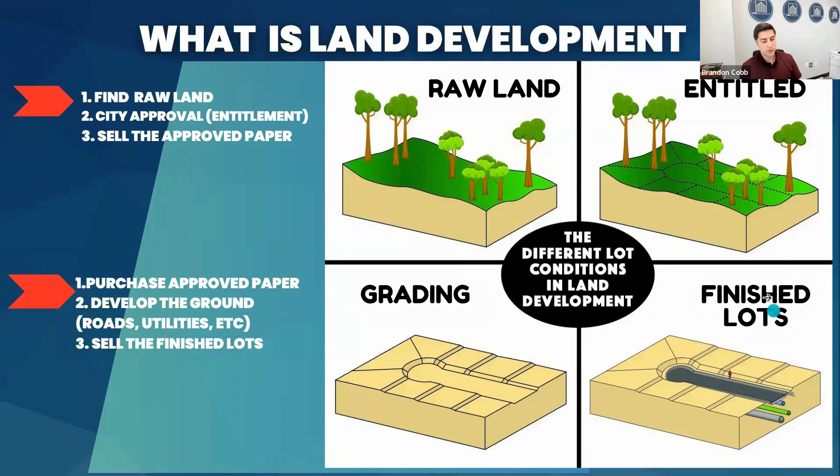So there's two options: one, sell the paper, and two, actually sell finished lots to national home builders. There's pros and cons to both, and this is a lot faster of a process, right? So construction drawings are finished, and then you sell that to a national home builder or a developer that wants to develop. And this is a lot longer of a process because you have to actually do the development, right? And the process definitely depends on what state and county and municipality you're in. It can be shorter or longer. If you're in California, I'm sorry, it's a long process, or New York, New Jersey, etc.

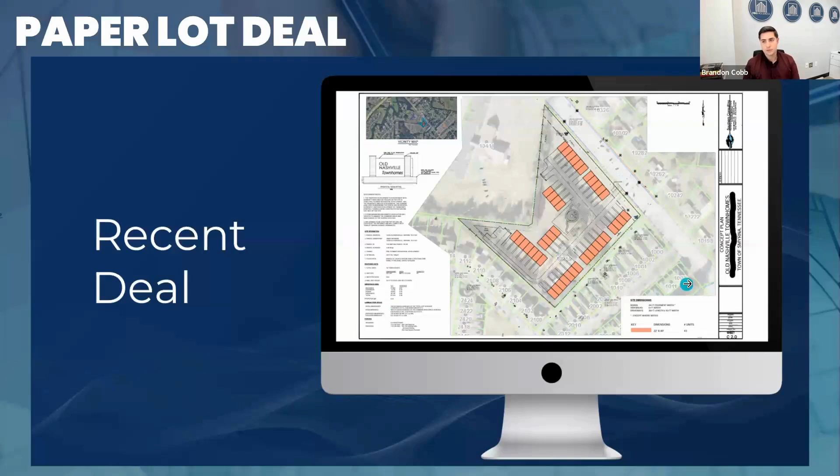It was one of the first entitlement process, paper lot deals. This is one that we just did in Smyrna, Tennessee. And there you go. We made $446,000. It was pretty easy deal. It would have been easier if the person that brought it to us actually followed.

There's some missteps, but I think it was a really good learning lesson for that person, honestly. It probably would have taken 6 months, but it took 12 months. And we didn't have to. It probably took about 20 hours of work, honestly. And so it's pretty good return on investment there.

And then this is another project where we took that paper, but we actually got it funded and put in the actual lots. As you can tell, this is a townhome development. There was 36 homes there. There's about 34 single family lots here. This is actually called Seidov Cobb Way in White Bluff, Tennessee. And this is called Lala Loop.

So Seidov is my last name, Cobb is Brandon's last name, and Lala is my mom's name. So Lala Loop there. So that's something cool that you can do when you develop properties. Even if you're entitled in paper, you can kind of name it and honor people that mean something to you, and just leave a legacy behind. So I think that's one of the coolest things. That's one of my favorite things to do.

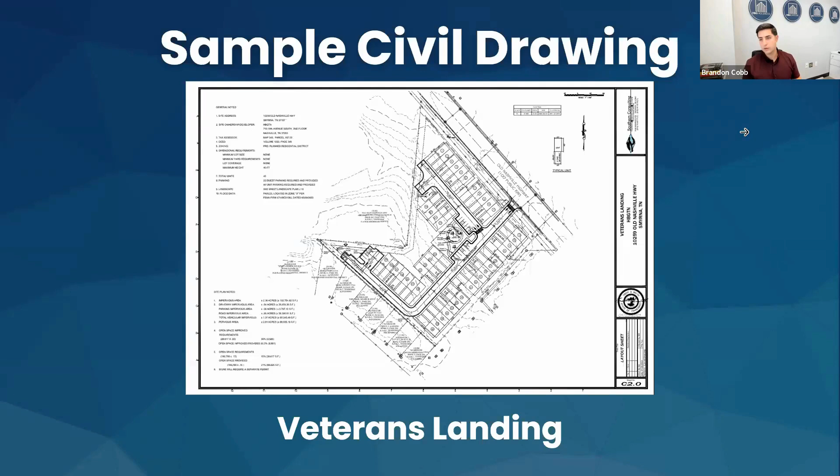And if you were to take this on, there are some items that I will cover at the end that I think are critical and that you can really lose your butt on if you don't hit on these. And if you do, you can save a significant amount of money. So I'll cover those at the end.

So how do we start? So right now you have a piece of property, you got it under contract, and you're like, where do I start? So you start by really talking to the staff, right? The stakeholders. You want to be able to talk to the planning commission, the city council, the planning staff. What do they want in the area?

So then, let's say that they want single family homes or whatever have you, right? So you have to make sure that you design a concept plan. A concept plan is literally just a basic drawing of what it is that you're going to actually put, right?

It's not exact, but it's trying to dial in the correct lot dimensions, widths, etc. to put those onto paper so you can understand the density that you're going to be able to get.

Okay. So this is an actual concept plan. We would take this concept plan that will be done by a civil engineer, and we'll put all of the roads, etc. that are in accordance with that local municipality. Specifically in this municipality, they have what's called the Hartman overlay, right?

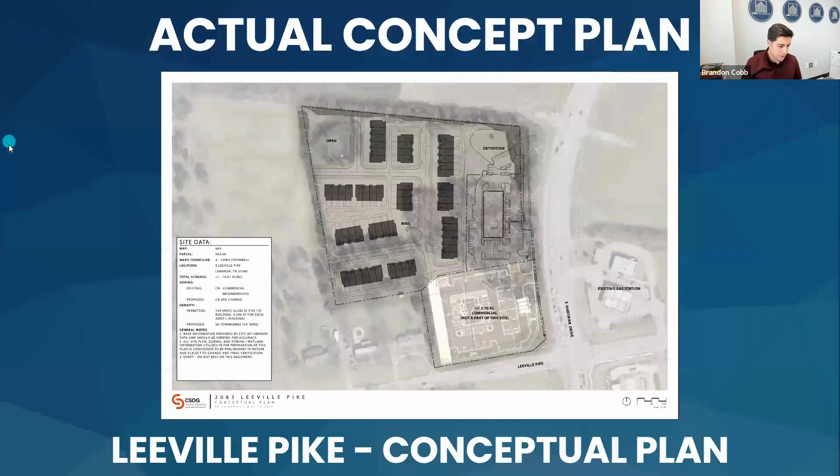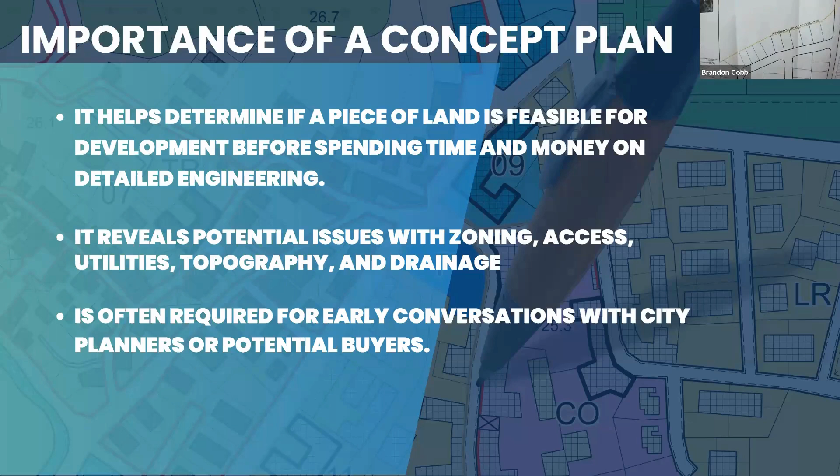And you also take into account, while you're doing this, so this is rather flat, I don't know if you could see this, but these are the lines there. The state has what's called LIDAR, which is the contours of the earth, right? And how it actually lays, to make sure that you're not putting a box onto a side of a cliff, because you probably couldn't do that. So it takes that into account as well. On this site, we knew that it was pretty flat, so the contours were not really that important.

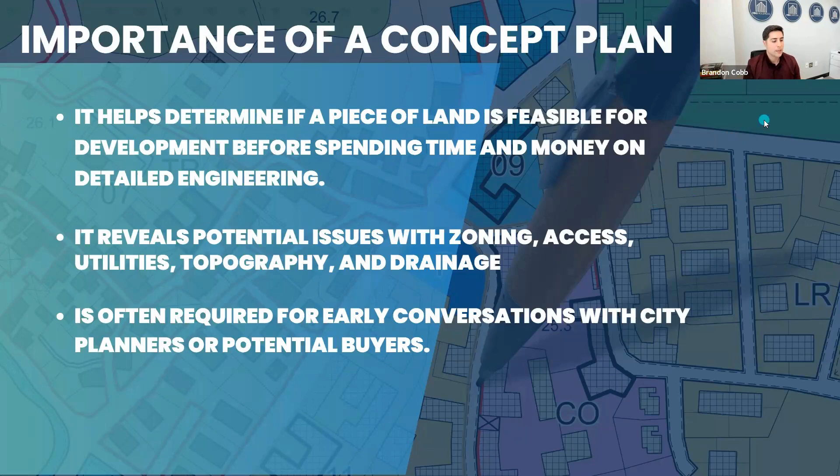So what do we do? How do we hire an engineer to do this? For our firm, we focus on hiring a civil engineer that is recommended by the municipality that I'm trying to submit to. So whoever they like working with, that's probably going to be the civil engineer that I'm going to hire. So when I talk to them, I ask them who they recommend. They'll give me a couple firms, and I'll reach out to those firms and I'll ask for a concept plan.

The reason I do that is because they have a working relationship with that municipality, and that planning staff and engineering staff know best who is a good engineer and who is bad and who they have a good working relationship with. Okay. Again, the good concept plan is going to have this.

A good civil engineering firm is going to have a good land planner, and that is somebody that knows exactly how to lay out a site. They want to have an actual civil engineer that can sign off on the actual construction drawings that we're going to go into if this concept is approved and the preliminary plat is approved.

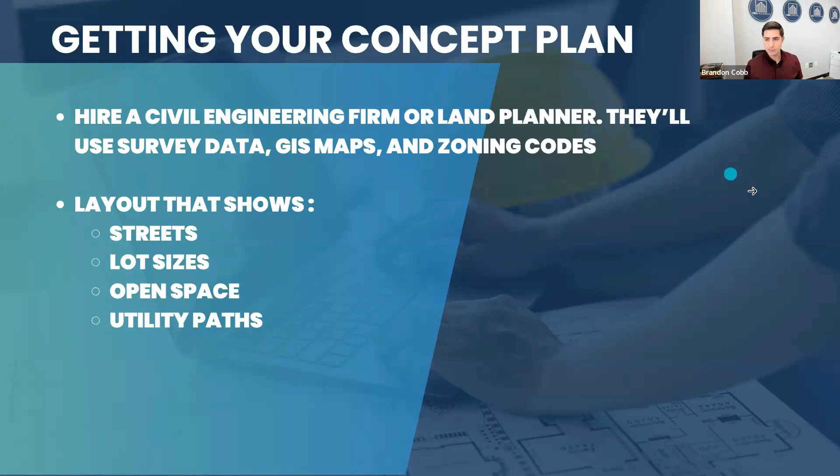And the reason for that is because they've got that civil engineer in there to see if their land planning, that concept plan, is actually going to be able to get built in reality, right? So it's a good check and balance to see if that land planner is in line.

So what we've got to do. When we're creating the concept plan, we want to make sure: what is the zoning? Like, what can we put on here? Sometimes folks are like, oh, I'm going to put an apartment here, or I'm going to put townhomes here. There may be a moratorium on townhomes, or maybe a moratorium on apartments.

Even if the zoning says potentially that you can do this, there also may be an unwritten moratorium where, yeah, you can put townhomes here, but no one on the planning commission is going to vote for townhomes because they don't want townhomes anymore. They have enough. They want single family homes.

So a good civil engineering firm is going to be able to tell you those unspoken things that the planning commission and/or the city council and the planning department has. Okay.

Brandon, any questions? Anybody got any questions so far? No, you're good, man. There's a couple questions in the chat, but we'll save them to the very end.

Cool. All right. So how do you know if you need to rezone? So you've got this concept plan, let's just say it's a commercial lot, it's got road frontage, and you want to check what the current zoning is. The current zoning is going to be on the GIS map. You can call the planning staff and ask them what their current zoning for that is. Like I said, it may say that it'll support townhomes or single family.

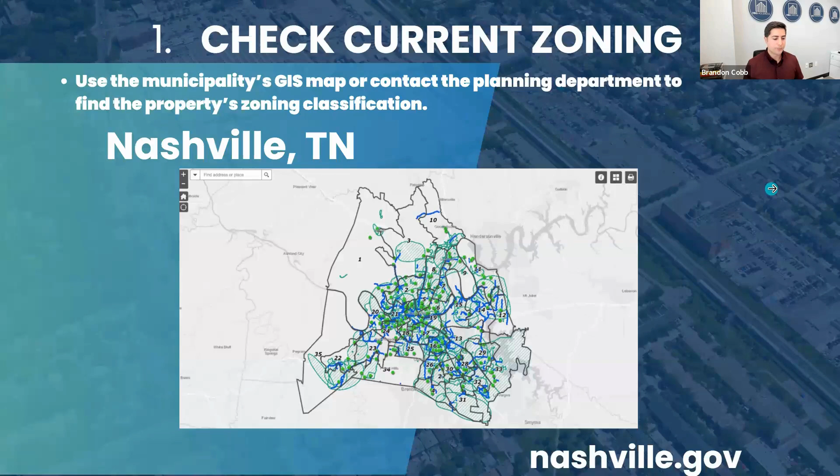So if we're in Nashville, we'll go to nashville.gov. There's the parcel viewer. We'll kind of go into a site. We'll try to figure out what the zoning classification for my site is. So I'll go to the parcel viewer. It'll tell me, let's say, R6. It'll say this is zoned R6.

I will then take that R6, go to the zoning classifications, and I didn't pull that up here, but you can go to the zoning ordinance, figure out what the R6 is, and it'll say 6,000 square foot lots. And let's say you have 60,000 square feet of lot, and you can be like, oh man, I now could put 10 homes here, possibly, right? So now this is where you kind of start your math.

And what you do is you'll go ahead and compare your site and what it is that you want to do. Let's say you want to put townhomes. Are there townhomes or single family homes in and around here? If the zoning allows, you can go ahead and put that in there.

And sometimes you have a commercial site and you're like, oh, I want to put townhomes here. And if there's no residential future plan for this area in the city's future plan, or when you talk to the city, they may not let you spot rezone that area, but they may.

So again, take that municipality, the agency review, and the planning staff will tell you what they want and don't want. Take that, and based on their guidance, you'll create your concept plan. You'll submit your concept plan to that planning staff. The planning staff is the staff that works for the planning commission. The planning commission are the members that have been placed by the mayor to vote on subdivisions to be approved or disapproved within the municipality.

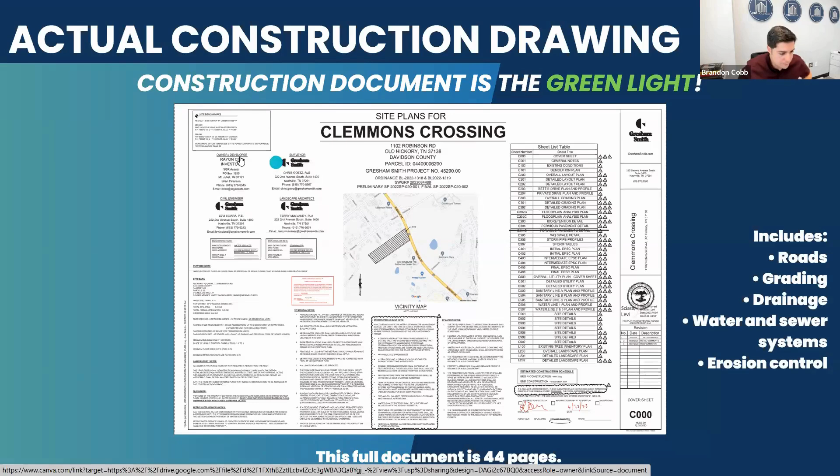So everybody see my screen? So now we can nerd out. Okay, so this document is 44 pages. I'm gonna kind of fly through it. If you have any questions, please put them in the chat and I will try to answer them at the end. I'll try to cover every single sheet. I may go a little faster because we're getting tight on time; it's a lot to cover in about 15 minutes. Here we go. Can everybody see my screen? Okay, great. So this is a subdivision that we are doing.

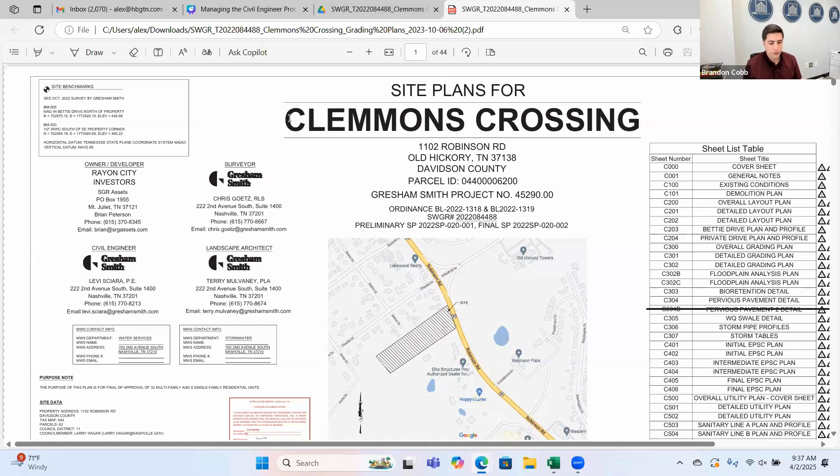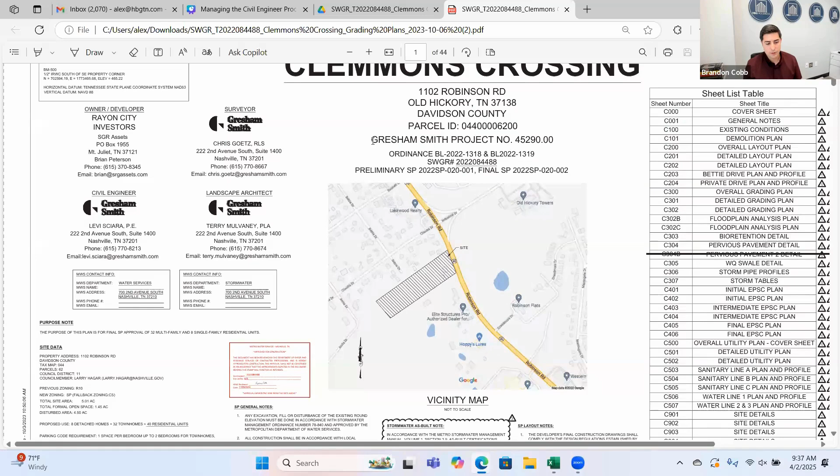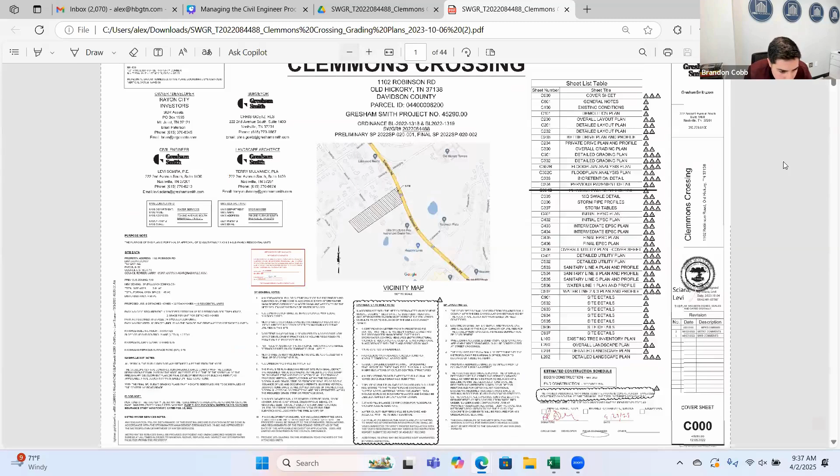The first page of a civil engineering plan has your title block, right? Clemmons Crossing is the subdivision. The address and the parcel of the actual property. Based on the municipality, it'll have the engineer here in the center, and the actual engineer who's designing it, to the right as well. Sometimes it's to the top, sometimes the bottom, but it's typically here in the margins.

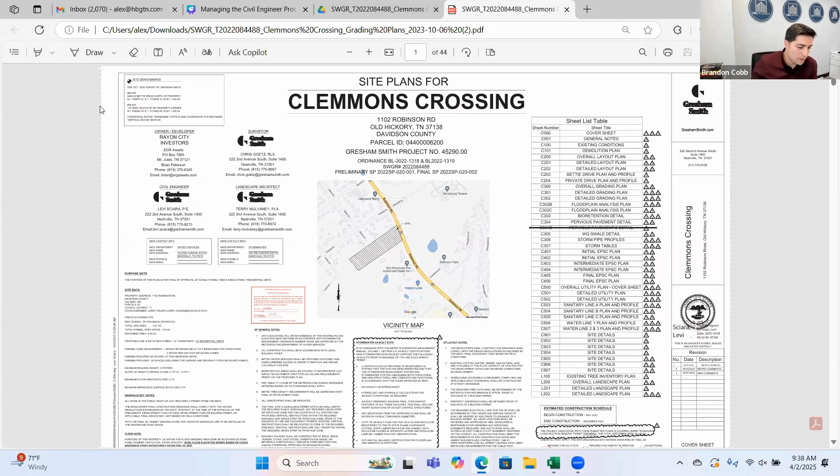In Nashville, it'll also have your stormwater permit number and your preliminary SP approval. See that? And your final SP approval. So this thing is approved preliminary, approved final, and now stormwater approved the grading as well. Then up top you have what's called a benchmark. Sometimes there's one, sometimes there's two.

A benchmark is a confirmed point of reference, verified by GPS, that says this is our 10-digit grid, and this is this point. Sometimes it's, let's say, the top of a fire hydrant. And it says the top of this is at 446.88 elevation above sea, and at this coordinate, north and south, right?

So you have a GPS coordinate for it. The reason it's important when we're doing civil engineering plans, we're talking about everything here talks about elevation and benchmark, and all that is, if you could just imagine your latitude, longitude, right? Your left to right, and the elevation is the depth of which you're going to be able to design your road, your sewer, etc.

These benchmarks that are set onto a site have a little GPS puck that we put on there, and it talks to all of the little tractors and all of the equipment to ensure that we're digging as deep as per the civil engineer in these design plans, and we are at that depth. It's just a confirmation to make sure that we are calibrated on this site. It's our calibration point to the site. It's called AKA benchmarks. Very important.

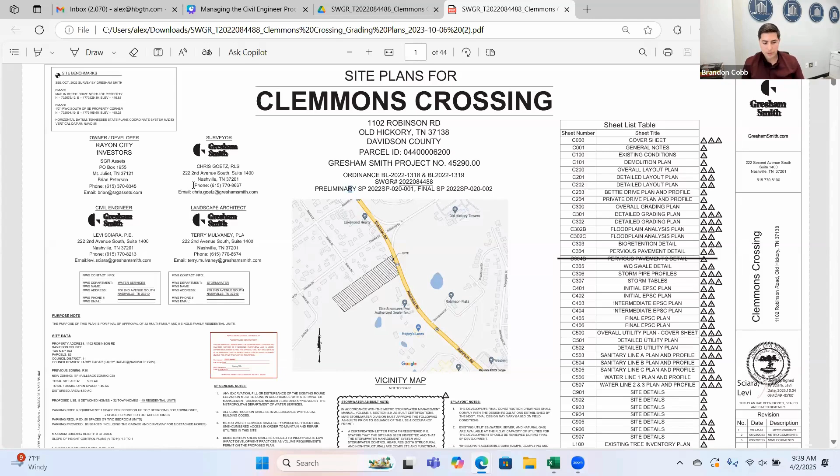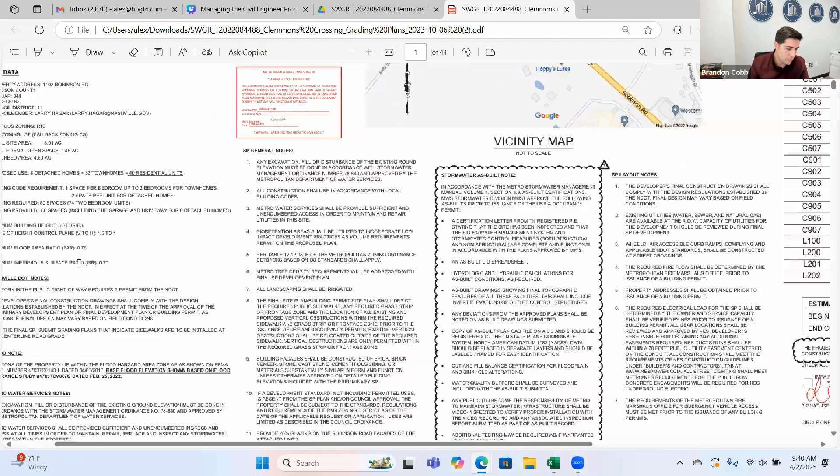All right. So talks about the developer. It'll give you who owns the property. Okay. And then you have what's called general notes and specific site data and special notes. Okay. That is all here. It talks about what kind of property this is. In every single municipality, the cover sheet sometimes is super detailed. It has a lot of data on it, and sometimes it doesn't. It's just based on the municipality.

In Nashville, it's very specific because every single reviewing body wants their specific notes. So the SP department, which is like the planning staff, wants you to have all these notes on here. Talks about the landscaping needs to be irrigated. You know, just this one point, why is that important? Because let's say you have 36 homes, right? And you have 36 water meters, right? Well, it says everything needs to be irrigated.

That means that if you have any grass that is outside of that actual lot, which you would, because you have some common space, it needs to be irrigated, which means you now have a secondary water meter that you need to account for in your construction budget, right? Because now it's another tap and it's now a bill to the HOA. So you want to make sure that you read, you understand all of the notes and all the requirements on your special notes and specified notes of every single sheet.

Okay. Your stormwater has, like, for instance, and I won't bore you to death because it'll be a lot to cover, but you have to do what's called an as-built drawing. So when we create our stormwater structures, right, the little drain that rain goes into, once that is done, so we have civil engineer plan, the blueprints that say, hey, go ahead and put this in. Then what we have to do is do an as-built.

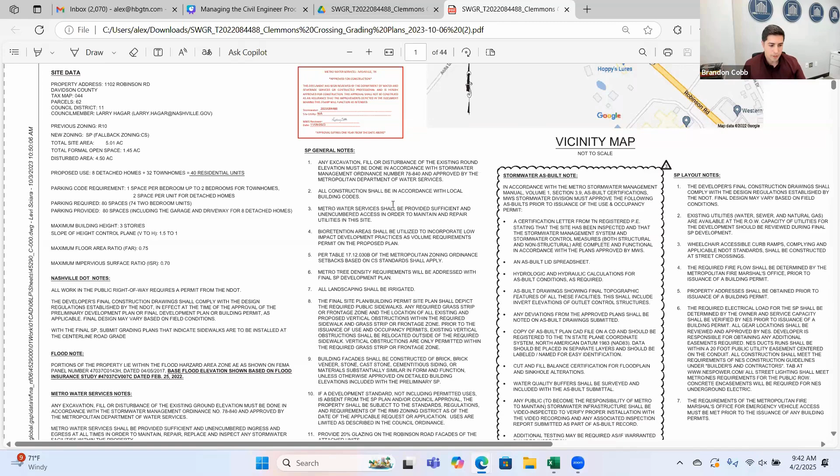And because you use that benchmark at the beginning of the project, you ensure that it's actually in the right spot in the right elevation. So what you'll do is do the as-built, and this is what the stormwater department is saying, is that it wants you to present that to them for them to give you an approval. So a whole bunch of notes, very important. Typically you have a signature here telling you that your stuff is approved and some signatures at the bottom.

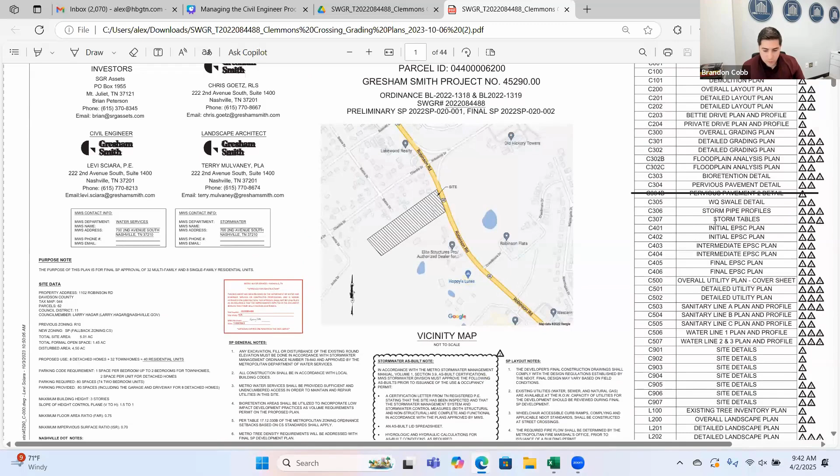This is what's called your sheet list table. Your sheet list table will have all of the sheet numbers, and it's going to have all the plans per sheet, right? So in Nashville, you have all these other notes, your erosion prevention, it has your grading and drainage notes, etc. Okay, demolition.

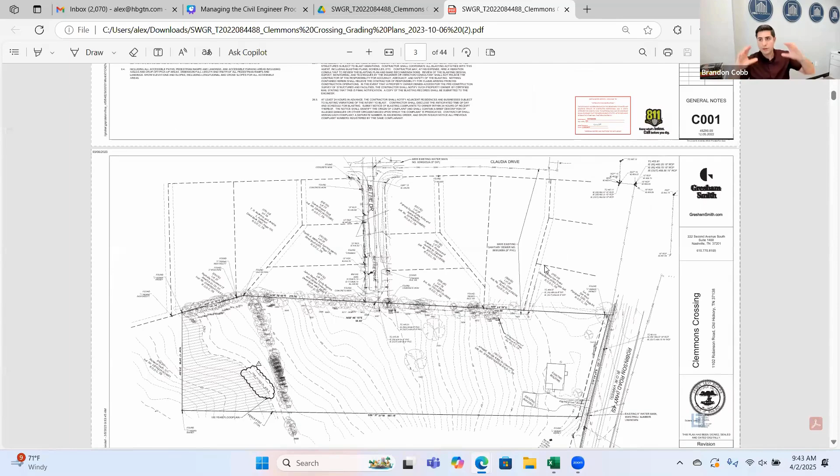So in here, this is what's called your existing conditions. So right now, when this thing got surveyed, this is the existing conditions. You have a house here, you've got some bushes. This is the current topography. Okay, so that's what this sheet calls for.

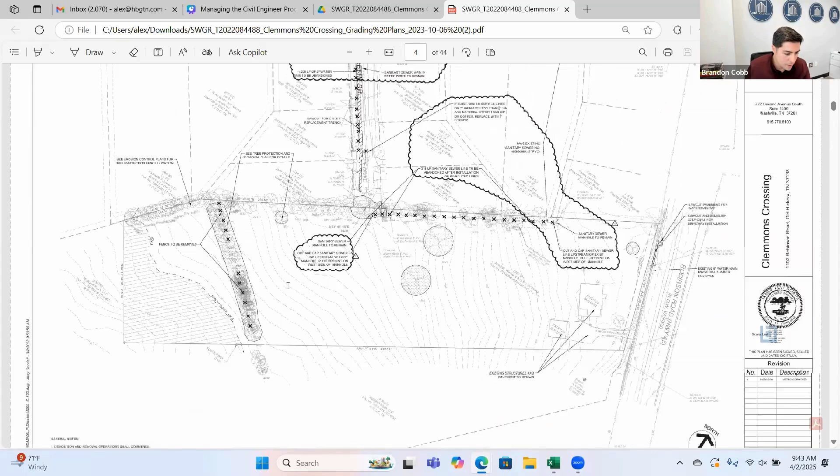Then you have what's called your demolition. Like what are we actually going to do to this site? On this site specifically, there's a house, we're going to actually keep that house. We're not going to demo it. Everywhere else, it's going to talk about, like this says, cut and cap sanitary sewer upstream of existing manhole, plug the opening on the west side of the manhole.

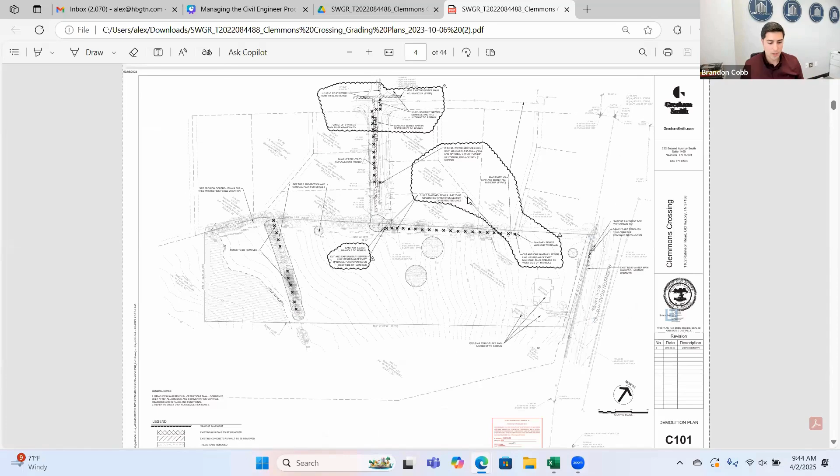So it's telling us exactly what we have to actually do. And then here we're going to have to protect the tree from silt, so we'll put like little noodles around it. So it tells us exactly what to do for our demolition or clearing of the site.

Okay. The next one is going to be your overall layout. So this is just overall, this is what the site's going to look like. And then you're going to get into your detailed layout plan, and your detailed layout plan is going to actually start talking about distances and the radiuses that are actually going to be on the drawing.

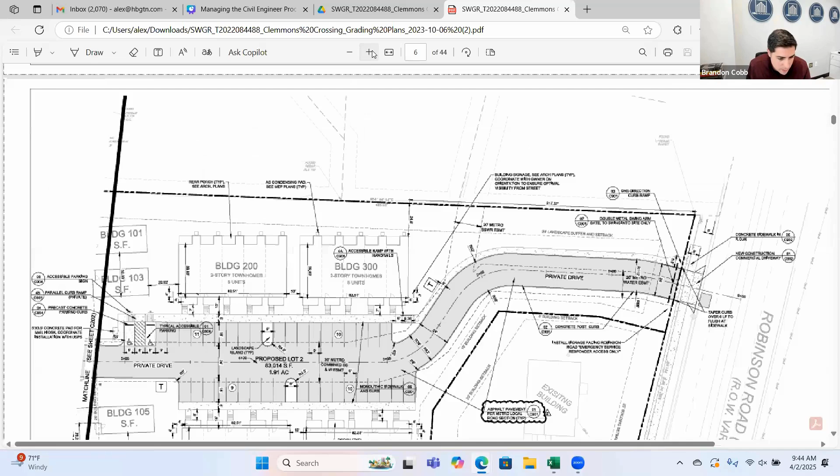Okay. Also, one of the things I wanted to mention is, over here to the right, you always have a revision. So let's say we got on the site and we need the engineer to revise it. This is very important because it has a revision date of like Metro Water, stormwater. They wanted a specific thing. We're confirming that this sheet now is in line with that comment of MWS, so we're on the right revision of our plan.

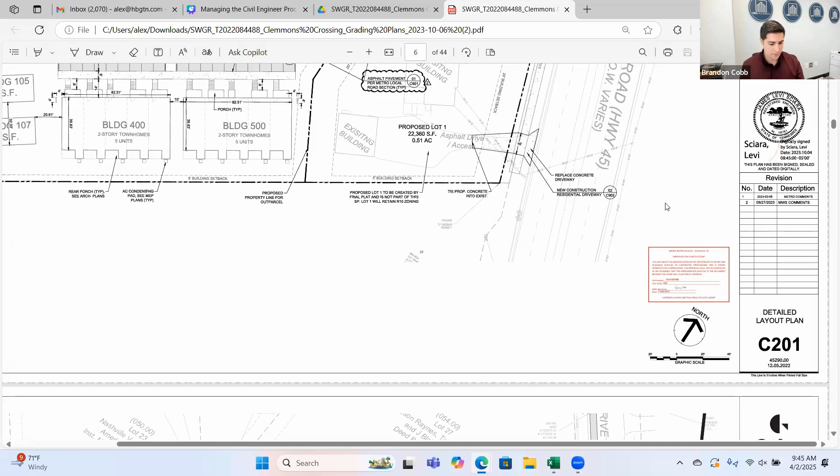Okay. So this is the detailed layout plan. And as you can tell here, there was a couple, right? So your detailed layout plan is going to be sometimes 2, 3, 4 pages. So let's just talk about it. Okay.

So here, you talk about, okay, how do I get my costs, my takeoffs, right? How much is this going to cost me? So there are companies that'll do what's called a takeoff. They'll figure out all the materials. Your civil engineer will give you an estimate of construction, and a civil contractor will look at all these plans. And the more details there are, the more apples to apples you're going to get of an actual bid. So it's very important that you have very good detailed plans.

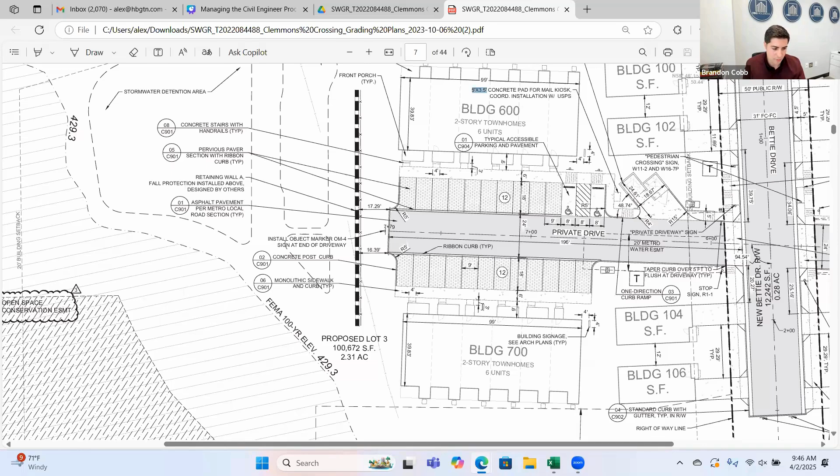For instance, this says a 5-foot by 3.5-foot concrete pad for a mail kiosk, right? So now you have to think, okay, I have to get a mail kiosk. Not only does it have to have a concrete pad, but now I have to buy the actual kiosk. So this is going to allow you to really figure out how much this whole thing is going to cost you. And then we'll talk here in a second about some value engineering of what you can do. All right, here we go.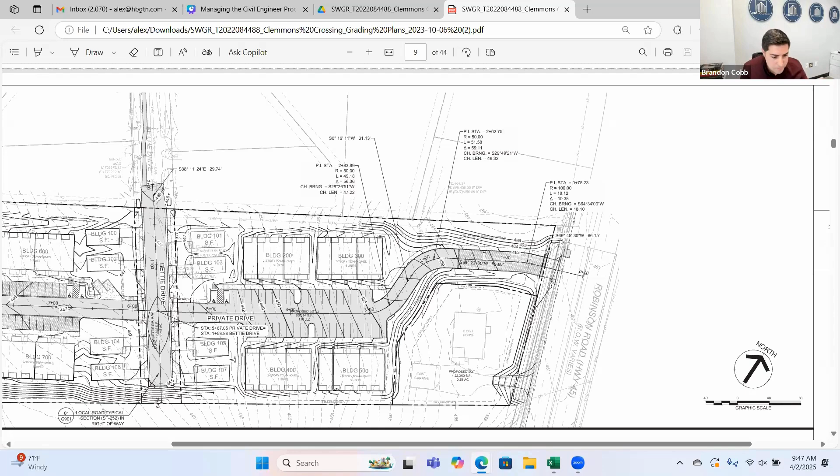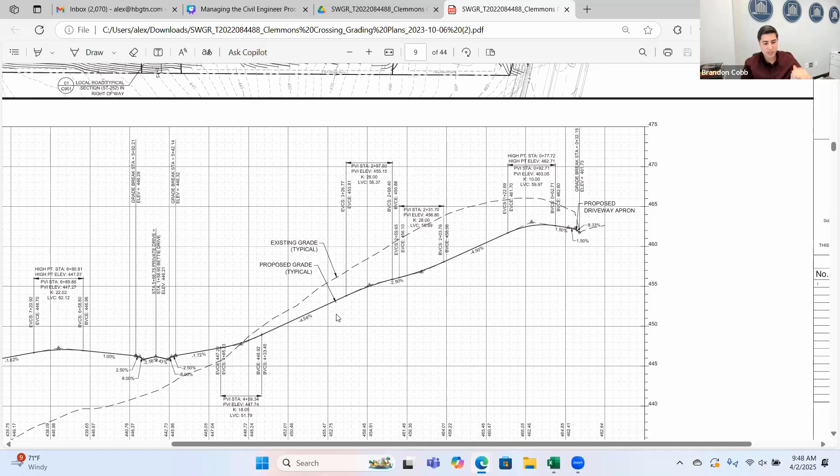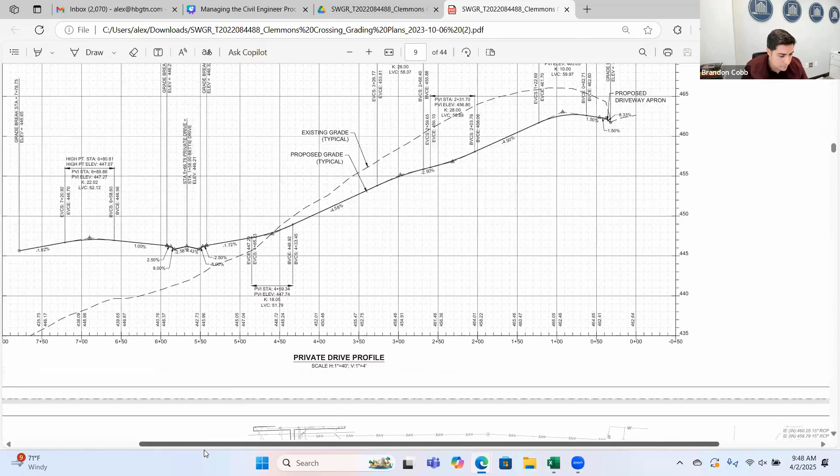Okay. And then this is what's called the profile, and it's telling us that this is our current existing grade, but this is our proposed grade. So in this instance here we are cutting, but in this instance here, we're actually filling. I don't know if you can see that, right? And it'll tell you at what degree, what elevation and at what slope you're actually cutting and or filling your site.

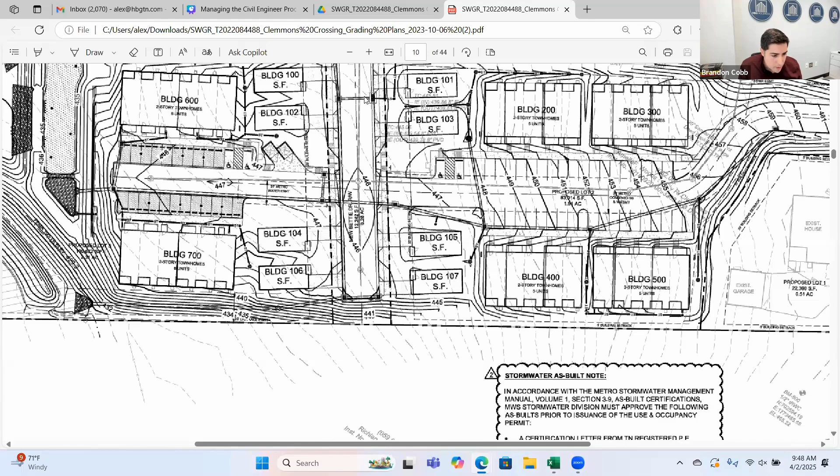All right. So this kind of continues, and then here on this sheet we have our stormwater. This is where our stormwater and grading is very important. Based on how your civil engineer grades your plan, you see how this site kind of looks like this. This is your high point. And they're grading the entire site to then go into these little black squares. Those are your stormwater structures and your stormwater pipe.

I will fast forward to... Those are like the ditches that the water drains into on the side of the curbs? Correct.

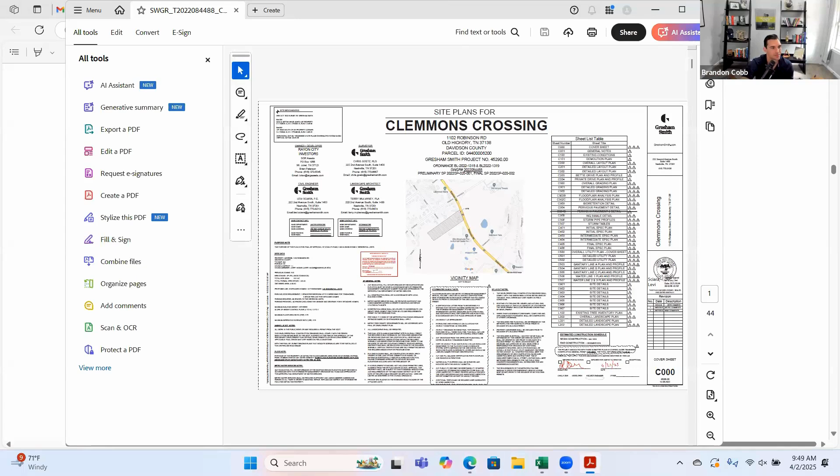It's not... I don't know why it's doing that. Download. Hold on a second. Give me 1 second. For some reason it's acting kind of funny. So excuse me. All right. Can you still see my screen now? I think because it's a large document, it's taking time to load as you scroll down. Do you see it now? Yeah. I have it pulled up again.

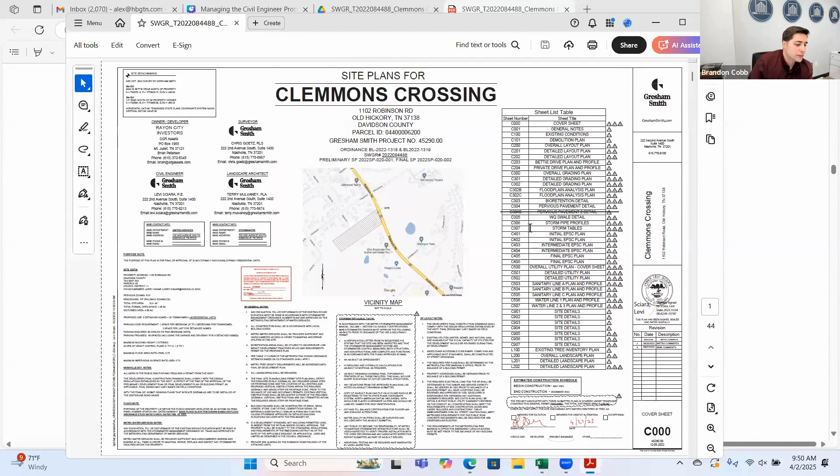Tarek, do you see the first slide? Like I'm on. All right. So let me go through back to. All right. Okay. So here we are.

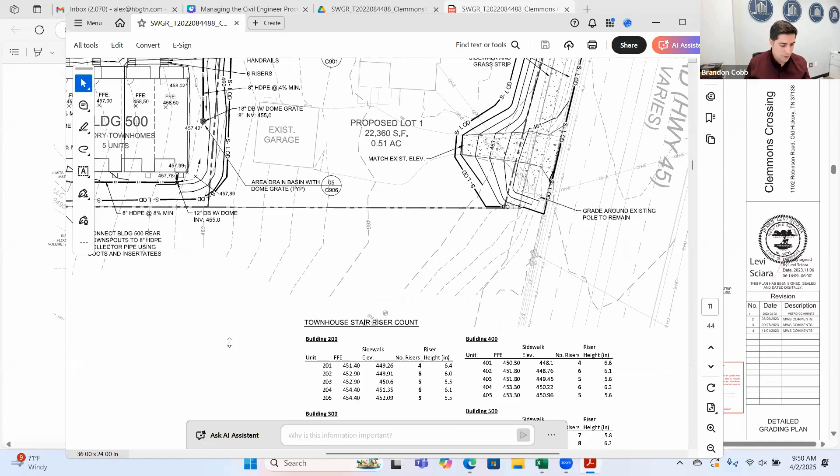We're at the grading plan. This is what I wanted to kind of talk to you about. So this is where on this specific site, because it's an SP, you're telling the city exactly what kind of homes you're going to build. And in Nashville, they want to know the elevation of what's called the finished floor elevation, FFE, of every single unit. Okay.

So when you go here, it says your elevation is 455.5. That means 455.5 feet above sea elevation. And then this is 457 feet. That means when I grade, that second home is going to be 2 feet higher than the one. So it's going to be kind of stair stepping up.

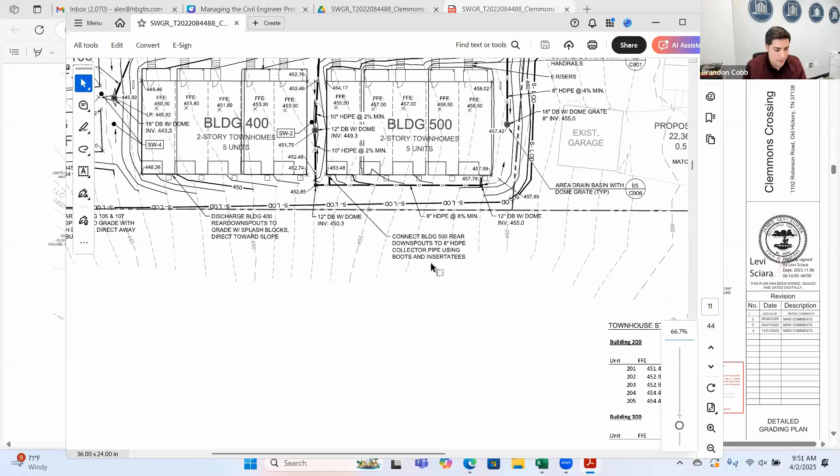This is important to quite a few people. One, it's important to your grader because it needs to grade accordingly. Second, it's important to your foundation people. Thirdly, it's important to your framing people because this structure is going to be one structure and they need to make sure that they follow this, right? So if you're actually constructing this, you need to make sure that's done properly. Okay. And then it also tells you all your discharge points for all of your stormwater.

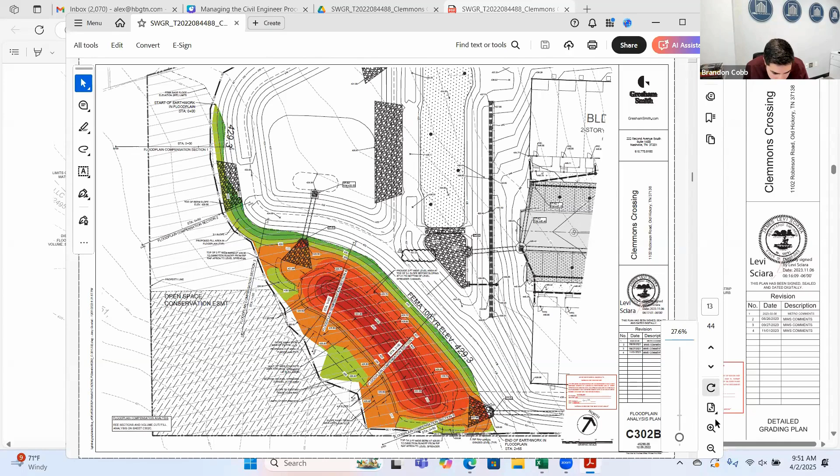So this is your floodplain analysis. This says that this is in a floodplain. What do you need to stay out of? The places you need to stay out of, etc. Let's see. This is pretty extensive. Hold on. All right.

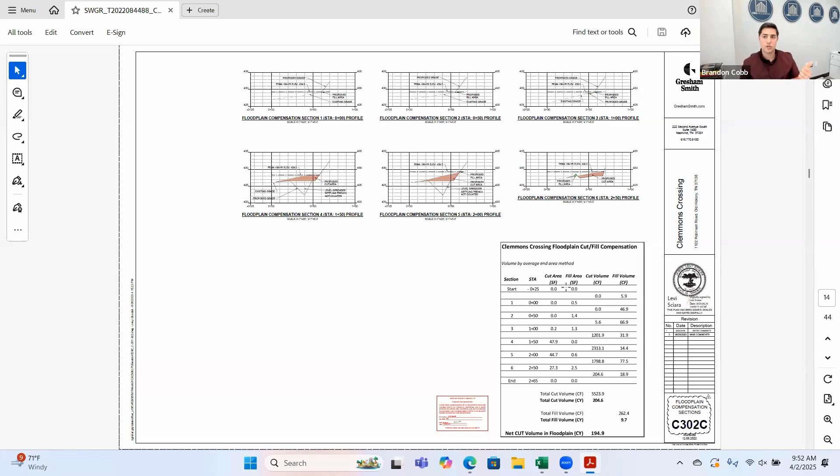So here you have your cut and fill. Your person that's going to be grading your site is going to go off of these volumes on how much stuff they're going to cut. It means how much dirt they're going to take away and how much dirt they're going to have to put in and how are they going to balance the site. It's very important because that's how much they're charging you, because typically they charge you per yard of material moved or brought in. Okay.

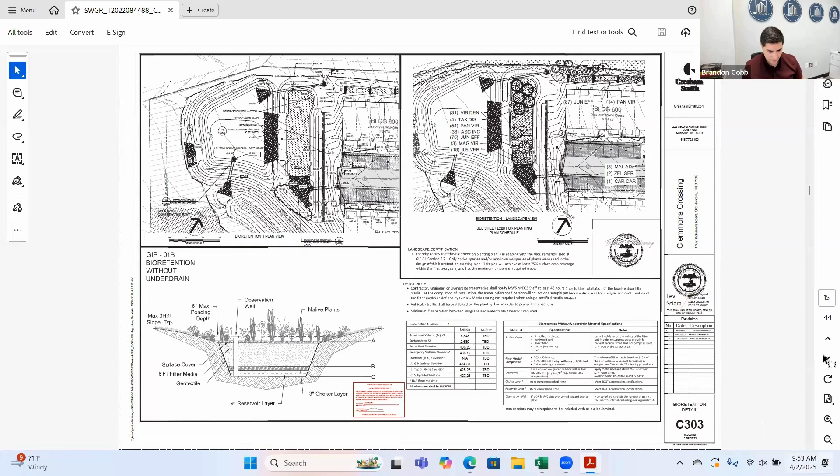What I want to show you is also, in some of the sheets, you'll have details. And at the end of the sheets, we'll go over briefly, you'll actually have exactly the cross section, how the city wants you to build this pond. There are many ways to build it. This is theirs, and they want to make sure that you build it in accordance to their specifications. So they'll have the cross sections and details on how that happens. So these are all details of every single stormwater structure, etc.

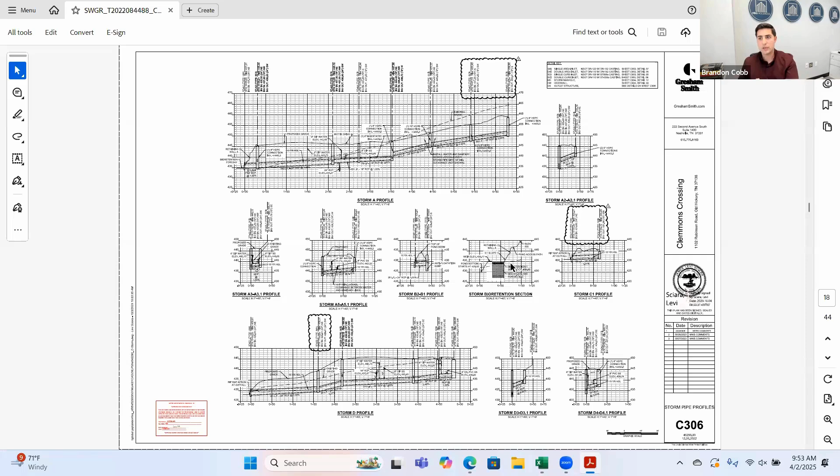Then we're going to the actual structures. So it talks about every structure that you make. Your concrete that's actually in the ground is made to each project. The reason for that is because you have your inverts, right? The pipe that comes into the structure and the pipe that comes out of the structure to keep water flowing. That little thing is made specifically for the site. So that's what this detail is, because it wants to show your storm structure Charlie 1 is this size and this depth and this width.

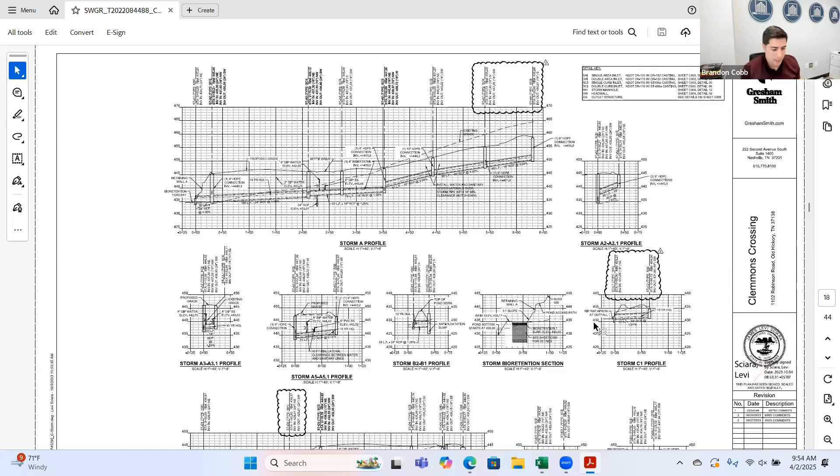So then we send that over when we send the CDs to a company that makes structures, and they price that out specifically for this project, and it'll come onto the project when we order it, kind of like a Lego piece. It'll say Charlie 1, Charlie 2, Charlie 3 in accordance with your plan. Okay. So this is a great example. You'll have all your structures, and you'll have exactly the inverts that we're talking about, pipe in and pipe out, and at what elevation, to make sure that those holes are made in those structures correctly. Okay.

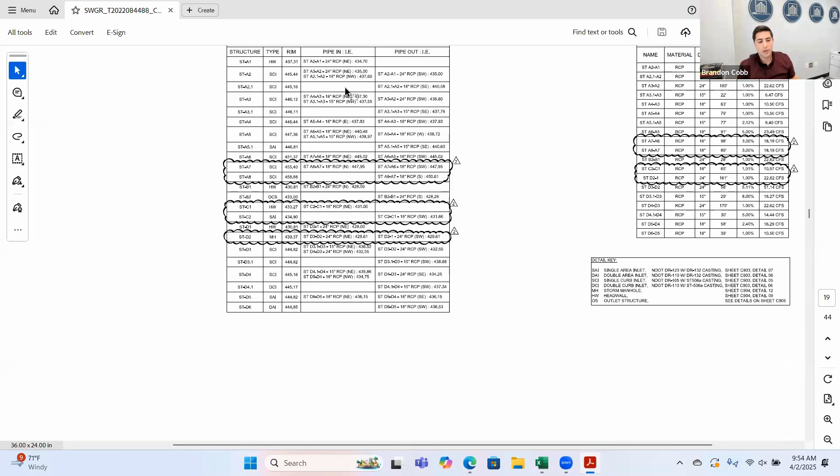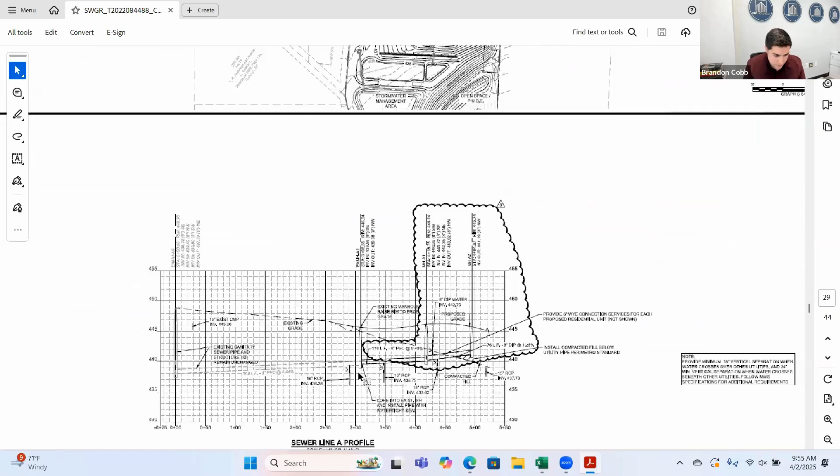And then you'll go through it. This is your stormwater, and where they're supposed to be laid out, etc. The same thing, you'll have your public water and sewer, because we need to know not only the size of your water and sewer line, and we're running a little bit out of time, but you also want to know the depth of that sewer manhole. So here we have to our left 445 feet, and the bottom of this thing is about a 439. So this manhole that's in the ground at that specific elevation and latitude, longitude, is about 6 feet deep.

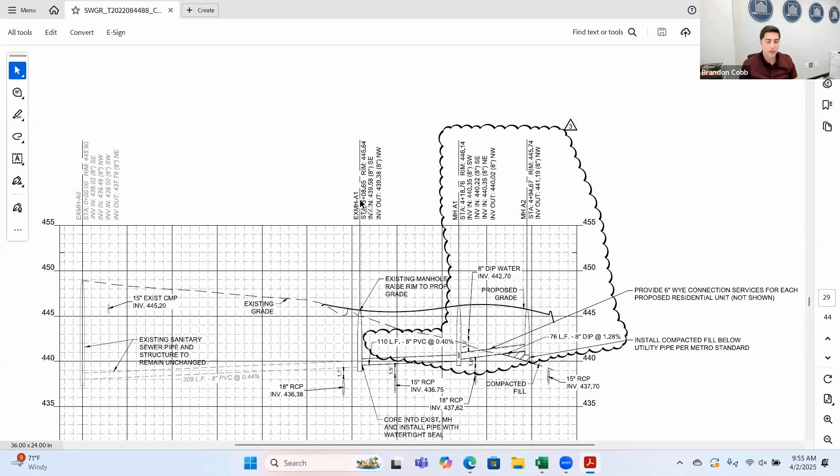But what's more important is that the invert for that manhole says that it's 439.58. It's an 8-inch hole, and it's facing southeast at this specific station, which means this specific azimuth, right? Because that is what angle that pipe is in that actual concrete structure. Okay, so all of this is important because you want to make sure that you're looking for this.

And before I finish, one of the things that you do when you're doing the development is geotechnical, right? Geotechnical is the investigation of the subsurface, right? How much rock, etc., is on this plan. So while we're going through the planning process and getting approved, we're doing a geotechnical survey. The reason we do that is because we want to know where the rock is.

So then the way that we lay out this site may be a little different. If we have a whole bunch of rock on one side, and we don't have any rock on this side, it may be beneficial for us to do maybe one less unit, or maybe to shift some units to get the sewer out of the rock.

Another thing that we do at our firm is we try to ask the local municipality. Some of them are favorable to this and some are not. So we say, hey, can we put the sewer in the front setback? So here, as you can tell, you have your sewer in the middle of the road. Well, sometimes we'll ask them, can we put it here in the grass? The reason that's important is because when I have to backfill, remember that sewer was 6 feet deep.

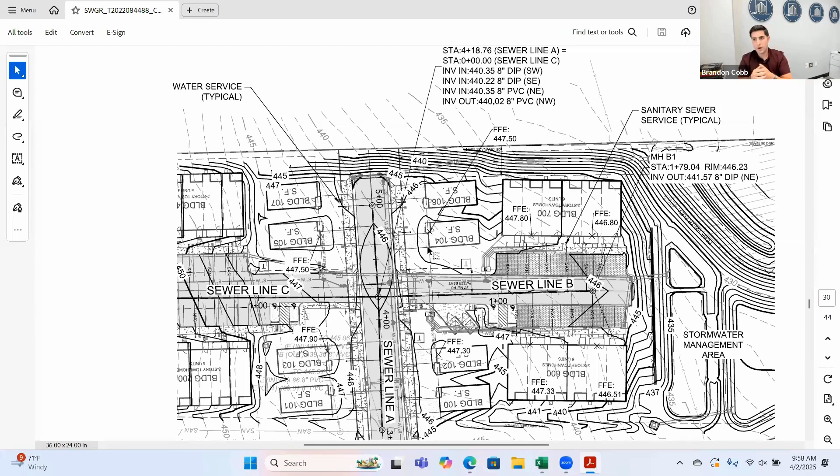Additionally, another thing that we do is if there's a neighbor here, so on the other side of this project, this guy's got a retaining wall. What we are trying to do right now is ask the neighbor, instead of putting a retaining wall, which we do because there's severe elevation change close to or near a property line, we would ask the neighbor for a slope easement to get onto their property and start grading from their property.

So we have a 3-to-1 slope rather than putting a retaining wall, because a retaining wall is very expensive. If I give this guy $5,000 to get a slope easement for a piece of property that he doesn't even care about because it's the edge of their property, it may be a win-win.

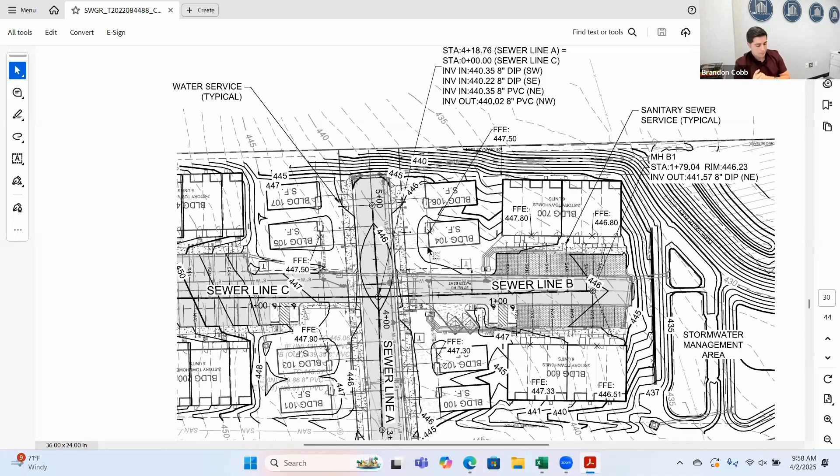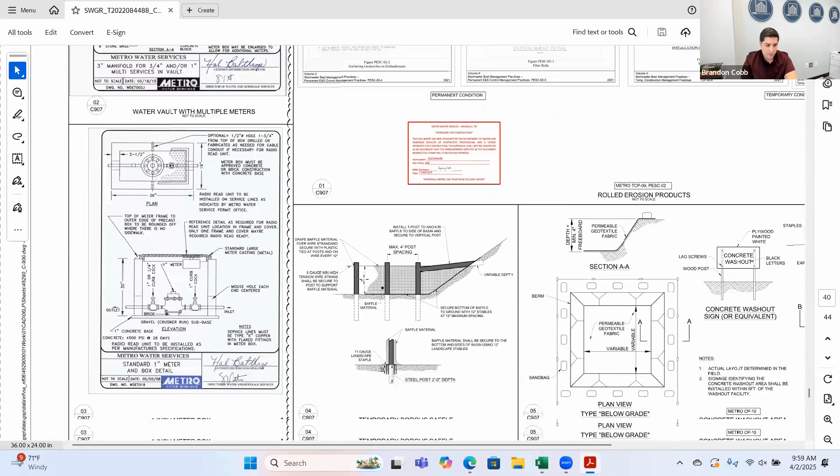Another thing here, we're almost out of time. I want to go to your details. So these are all the details on a site, okay? And that's typically at the bottom of your plans. This tells your contractor exactly what kind of materials, what design, etc., needs to be built here, and your trees, your landscaping, etc.

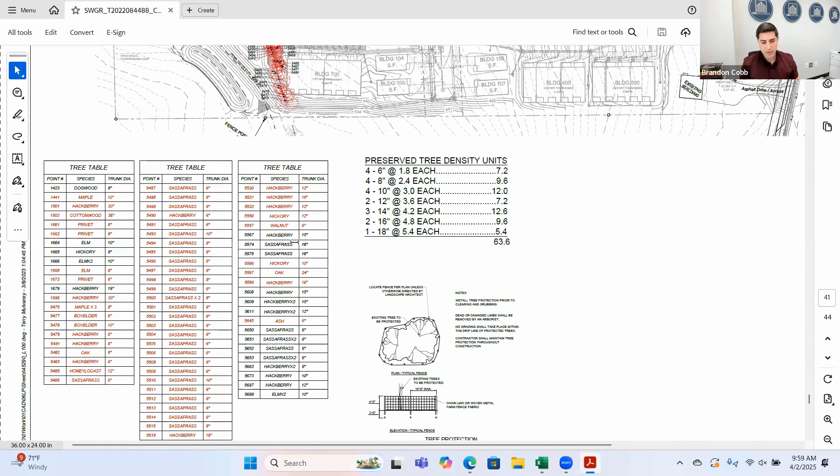Well, one of the other things that we try to do is put in a cheaper curb, which is called an extruded curb. It's a 6-inch curb. Some engineers like what's called a curb and gutter, but per linear foot, a curb and gutter is about $39 in this market, and extruded curb is about $6.50 to $9 here in Nashville. It may change based on wherever you are, but that's what we've got to pay here. So we try to put the cheaper curb.

Additionally, this plant schedule is where the city's saying these are the plants that I want you to have. If you were to design the site, you take this plant schedule, and rather than giving it to a local nursery, you go to an actual wholesale nursery, you set up an account, and a tree that costs you $600 you can sometimes get for $70, $80. They'll deliver to site and your civil contractor will just install them.

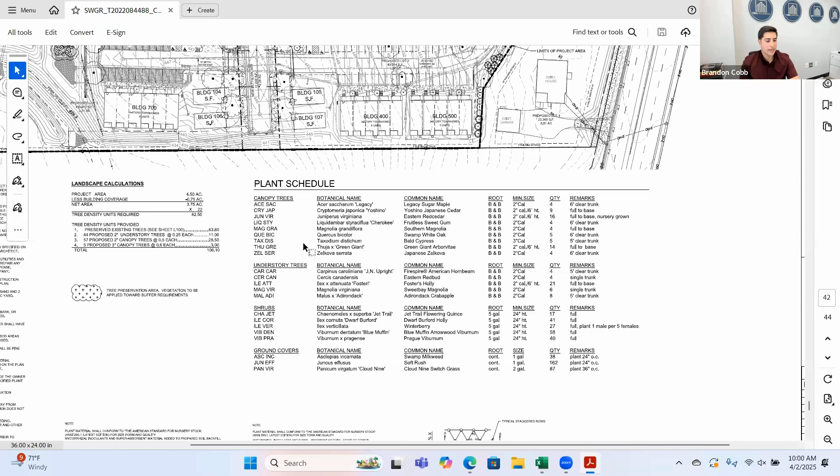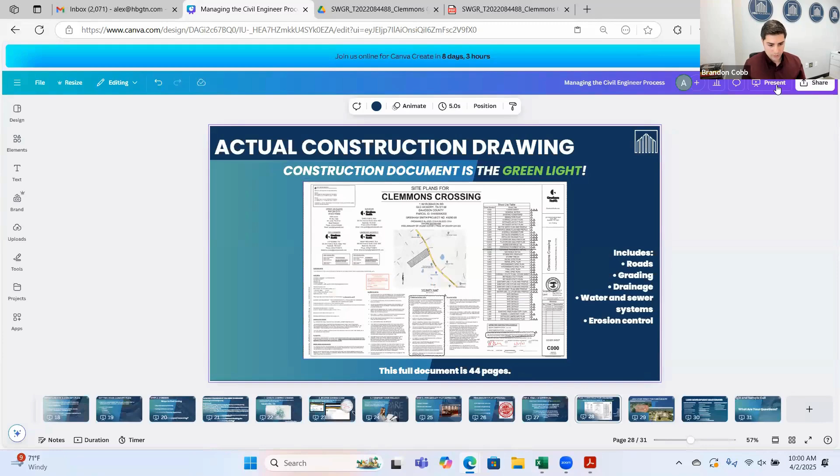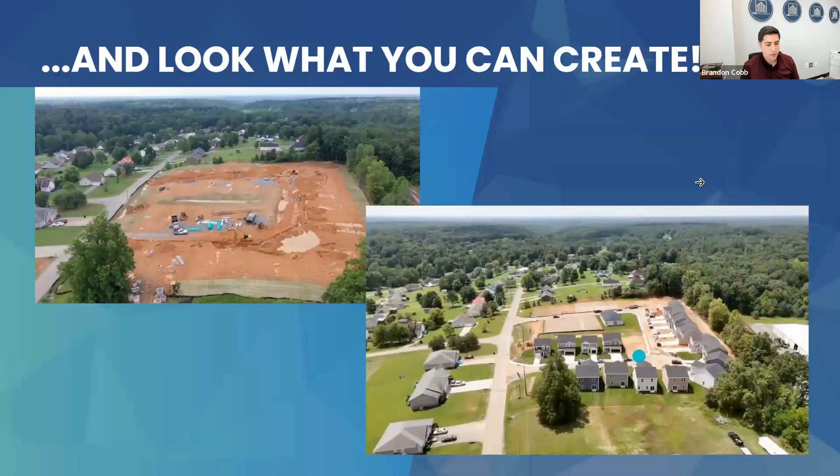I just wanted to cover as much of this as possible. It's really tough to cover all of it. But pending your questions, that's kind of what I've got here. So if you understand how to do that, then I believe you can do this. Just like that, you could go ahead and develop communities and make them like so. Pending your questions, that's kind of what I got. Brandon, you want to take this?

Yeah. And just to kind of recap what you just said, I don't know the ins and outs of the civil drawings and plans. Obviously, it definitely helps to know that. But is that a requirement? Do you need to understand how to read everything to do this kind of stuff? Or if you hire a good civil engineer, are they going to be able to manage most of it? I think if you hire a civil engineer, it's good, but I'll be honest with you.

I think you definitely want to know how to read this, and you want to have somebody to kind of hold your hand who has had experience, because you may have a good civil engineer, right? And they're creating the best product, but sometimes the best product is not needed in that market. You've got to make sure: are extruded curbs great? They work, right? Are curb and gutter great? Yeah, they look great, but they cost a lot more money.

So if you didn't know how to ask that question of your civil engineer, well, there you go. You just spent another $100,000 on your subdivision. Do you want to just give away $100,000? So you don't have to know these things, but you will be leaving a significant amount, millions of dollars, on the table if you don't. That's just the way it is.

Yeah. Are there third party people you can hire to audit your plans and look at them if you don't want to do that? Yeah, so there are some companies that'll value engineer your plan. So you can hire a third party. You've got your civil engineer, and then you just give your plan to another engineering firm to do what's called VE, value engineer your site. And then there's also companies.